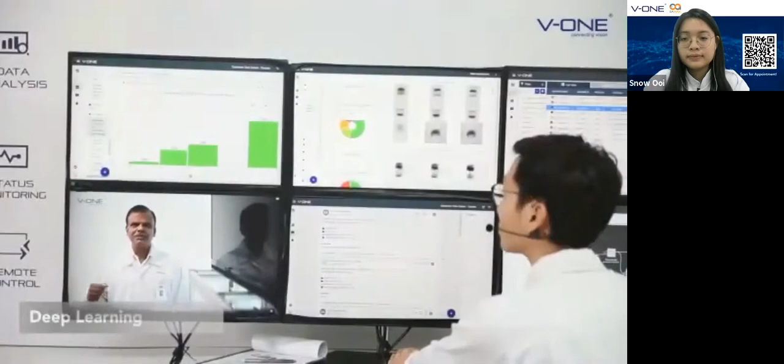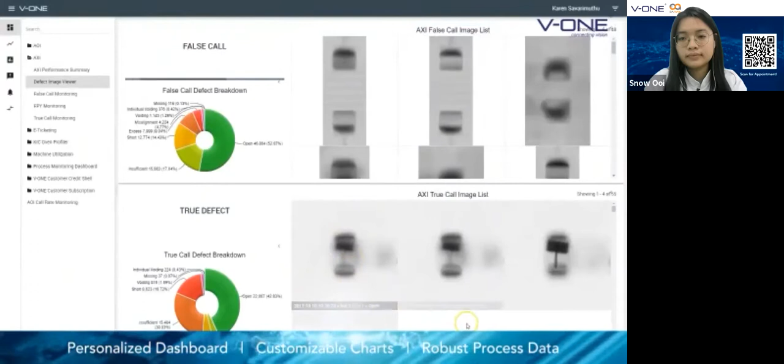V-ONE is a smart manufacturing software-based solution that stores your inspection and production data on a real-time basis.

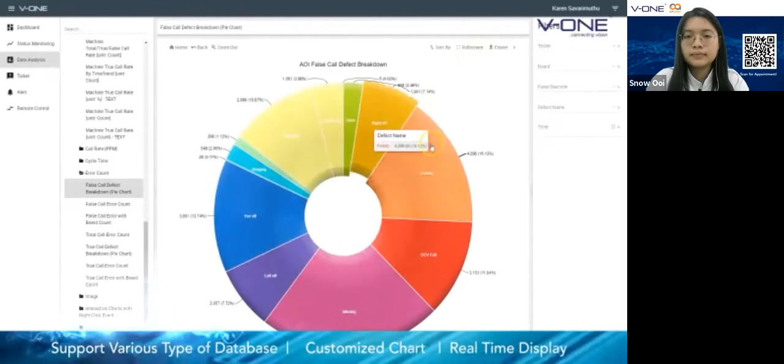Apart from the unlimited access to your personalized dashboard, the configurable triggering system will alert you on the abnormalities in a machine beforehand.

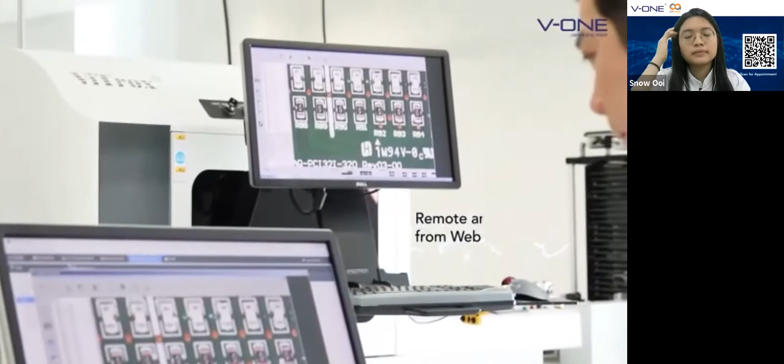With the latest V-ONE, we provide real-time notification and e-ticketing features to help users achieve no-touch time and smart manufacturing goals in no time.

With the idea of connect, visualize, and proact, V-ONE stands out in Industry 4.0 as it is applicable to customers of diverse industries.

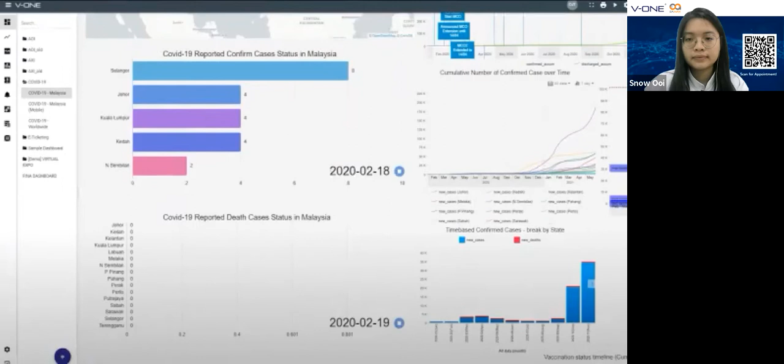Life is not always peaches and cream, as we are currently experiencing these unprecedented and difficult times. But in every book of life, you will have a chapter called hope. Hope that there is a ray of light at the end of every dark tunnel.

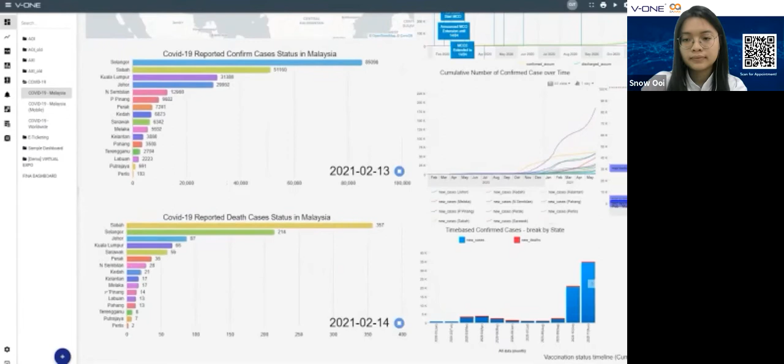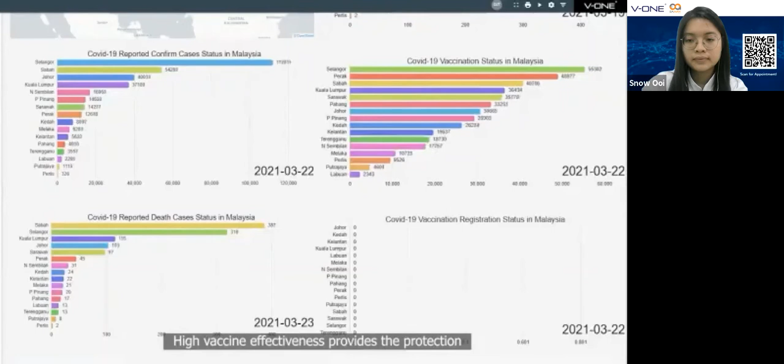Vaccination gives us hope amid variant concerns. In the meantime, COVID-19 vaccination status rate has recorded a consistent increase. High vaccine effectiveness provides protection against infection and reduces the virus's damaging effects.

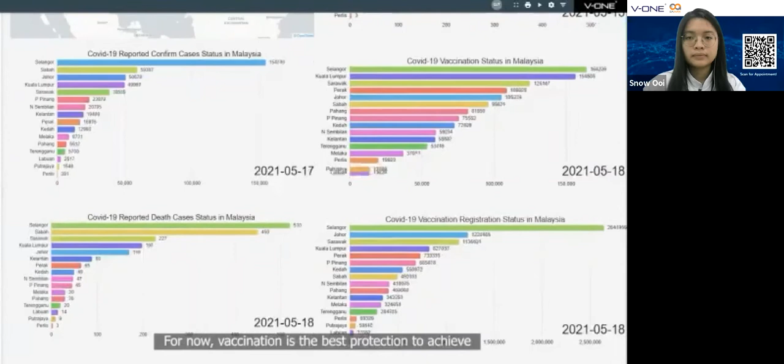We need to be open-minded and confident with the vaccine brought into Malaysia. We need to get vaccinated to protect ourselves, our family, and our loved ones. For now, vaccination is the best protection to achieve group immunity and bring us back to our normal life.

Same goes to the production line. You have to strengthen your production's immune system to increase the level of efficiency in manufacturing operations. In return for the Caring Act, V-ONE will be one of your boosters to the machine-to-machine's immune system, reducing machine downtime while increasing throughput.

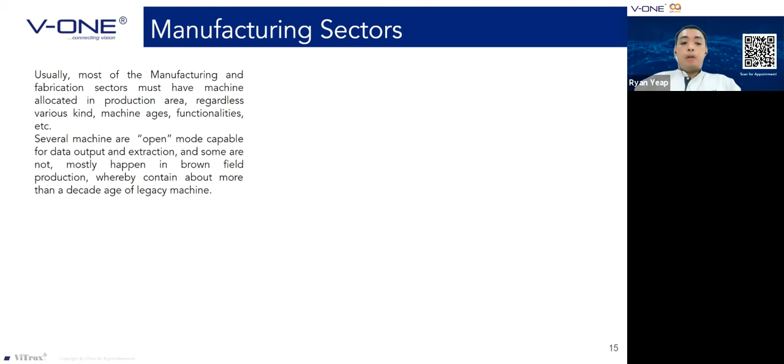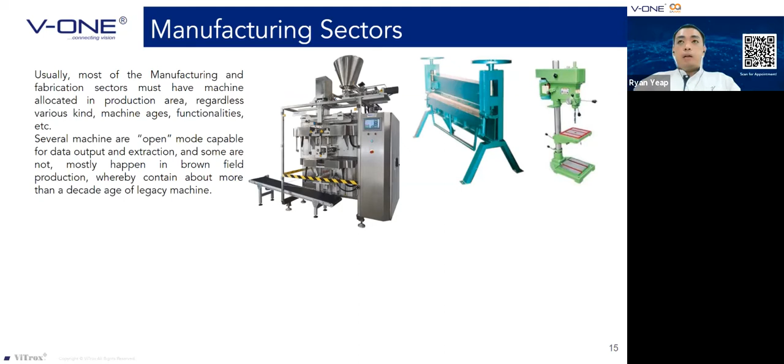Like most of the assembly industries, usually most manufacturing and fabrication sectors must have all the machines allocated in the production areas, regardless of various kinds of machine age and functionality. So most entrepreneurs might wonder and doubt whether the production capability can be sustained for another decade.

So the current condition of the machine, production operation versus ROI, and all of these questions require data to be analyzed. And the answer lies under the operation and production machine. So in order to acquire this data, we need to observe the machine specification itself, regardless of old or new, to see whether it still possesses IoT data extraction capabilities.

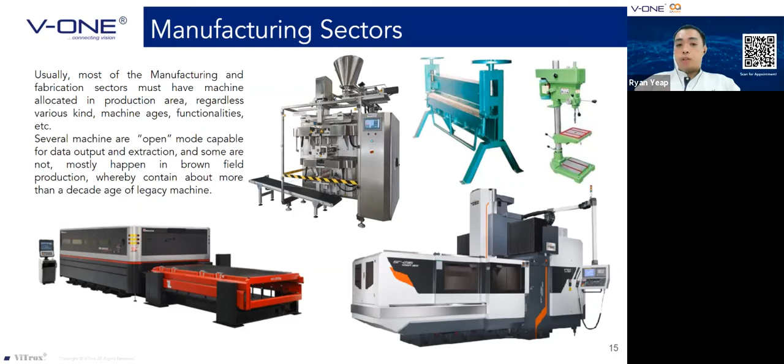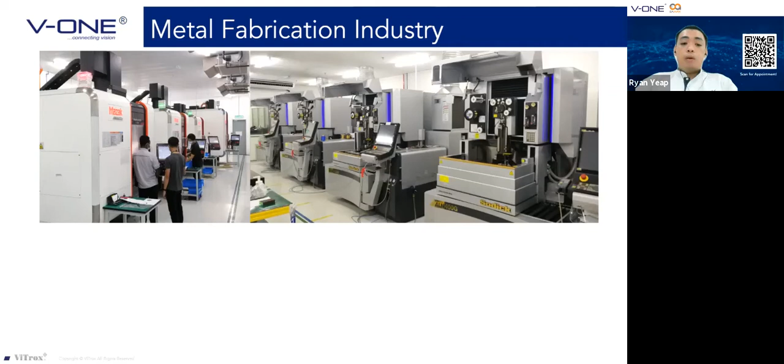So I would like to move on to the very first use case that I'm currently working on, which is the metal fabrication industry. This industry owns numerous kinds of fabrication machines and processes, such as CNC lathe machine, wire cut, milling, turning, laser cut, powder punch, bending, and welding, and so on. Each machine and process also contains crucial parameters according to their functionality.

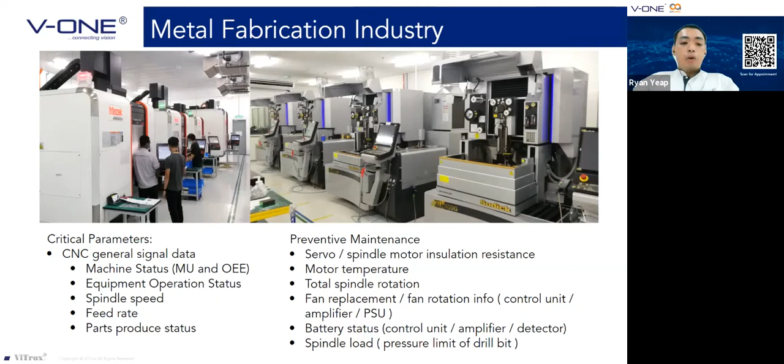So we are going to move on to one example of a standard CNC machine. As you can see in the picture shown here, this is one of the standard CNC 3-axis lathe machines.

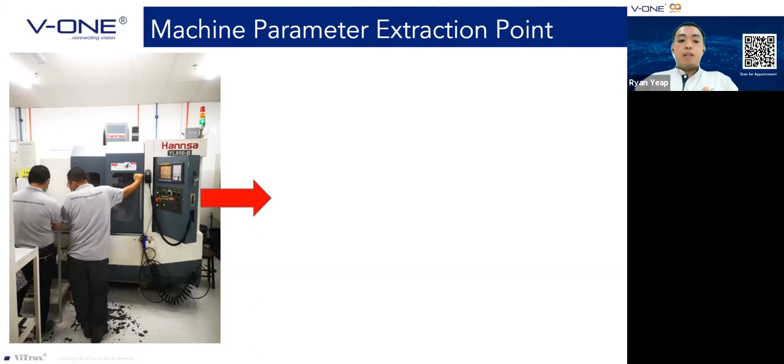Okay, so the CNC 3-axis machine has cutting tools that move along the 3 axes to mill the parts or cut various kinds of materials. It will perform a lot of fabrication such as milling slots, drilling holes, and also doing some cutting of edges.

Okay, so for this machine itself, we need to understand the concept of the machine operation and also the specification. By judging on that, you may find it contains numerous parameter data that can be acquired by using an appropriate IoT solution.

Okay, so for example, if you would like to see the condition of the machine operation, you can tap it from the tower light signal. From here you can get the machine operation. And for the motor, you can get the motor vibration data from the motor. And for the NC program, you can get the program job and the counting, and also the alarm log.

And then if you want to capture some equipment consumables, you can capture the oil level and pressure. So utilities like air pressure, drill bit, and the sprinkler, we also can acquire that.

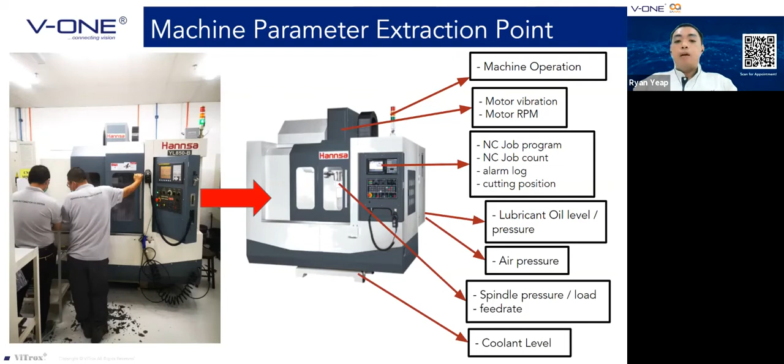Okay, so let's talk about one of the very critical, reliable core pieces of equipment for operating the machine, which we call the motor. Just like our human heart, the motor is a crucial part of the machine responsible for machine operation. Without it, or with any malfunction occurrence, it may be considered a total machine disposal, or there might be a chance for recovery such as repair or replacement by certain motor equipment, which is still available in the market.

So therefore, in order to ensure the motor equipment functionality, several precautions need to be done in order to prevent any downtime. One reliable method is to acquire equipment data from the motor itself. We assist with the appropriate parameter to determine the equipment health, for example, the vibration. So for the parameter, we determine the motor operation through the vibration frequency trend.

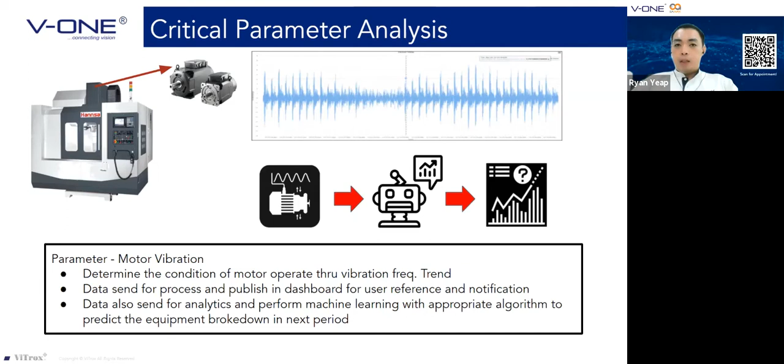And then the data we're going to send for processing and publish in the dashboard, or we can use it for doing the prediction of when the machine is going to break down. So we send this kind of data for the machine learning to train up, and then it can predict in the future, in the next 3 months, what the motor condition will be.

For the motor itself, we need to use an appropriate sensor as well. So by using a common and appropriate sensor, we call it a vibration sensor, which can be found in the current IoT market.

Besides this, we also need to understand the motor that has been used in your production machine - what kind of motor type and specifications, such as horsepower, pole, max RPM, and some other specifications. We need to understand this in order to estimate the vibration that can be produced by the motor itself.

But the thing is, for all those kinds of specifications, I think for the end user who might not have this kind of experience, by default you can search for another standard type of vibration sensor that can support up to 1 kilohertz, as this sensor can read the capable range for all kinds of machines and all kinds of motors.

As the motor is relied on to operate, the motor will be responsible for rotating the spindle. So another parameter we can measure is the spindle, which often has a shaft at its heart, and usually we attach a drill bit and the tooling to the spindle by grabbing it, in order to perform any fabrication job.

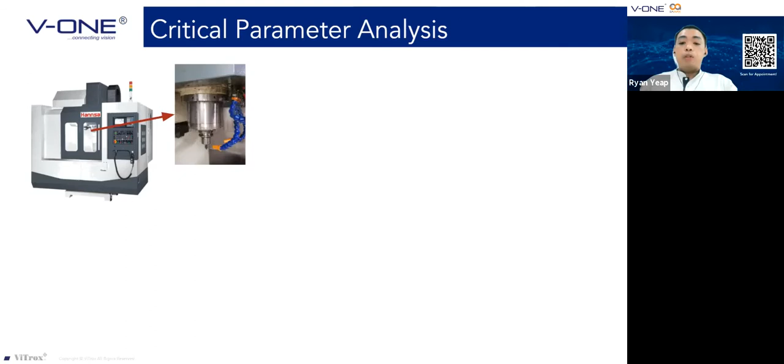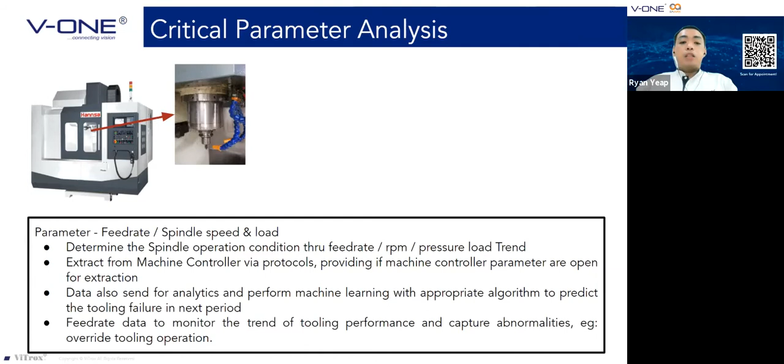As the fabrication process involves various types of material that need fabrication, some require precise specification or also concern the cost of time. So therefore, speed is the major parameter we need to take into account. So for the spindle, the parameter we can acquire is to determine the spindle operation condition through feed rate, RPM, or pressure, by generating the trend, extracting all the data, and then sending it to the database to also perform analysis.

So the feed rate - we're going to collect all the data so therefore we can monitor the trend of the tooling performance, and also capture the anomaly whereby the feed rate is being set too high or too low, according to the manual setting.

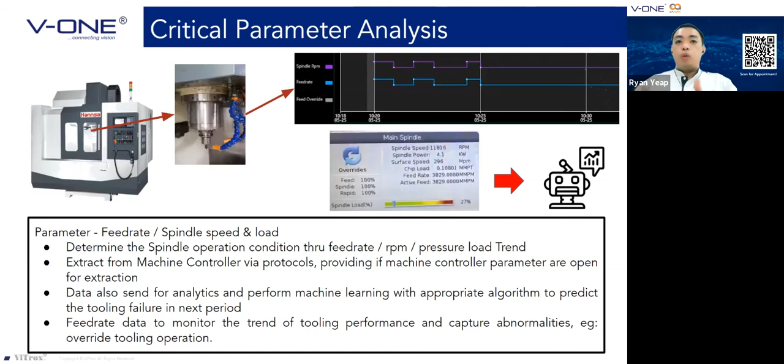The next topic is machine utilization. We might be wondering about the current status of our production machines. In case a user needs to go down to the production field to monitor and check the current operation status, this might be inconvenient because they have no place to see the entire production or the machine condition.

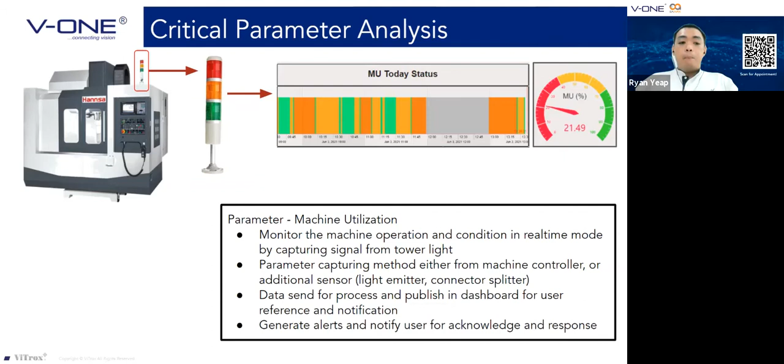Therefore, by using simple IoT equipment to deploy, such as capturing the signal from the tower light itself, the signal tower will convert all the signal into digital form, acquiring the signal and converting it into digital form to generate and publish the data into one place. This will also help calculate the machine utilization for a certain period. For example, we have one use case, which is this POC kit, currently developed at one of the legacy machines, whereby the legacy machine cannot extract the data from the machine controller itself.

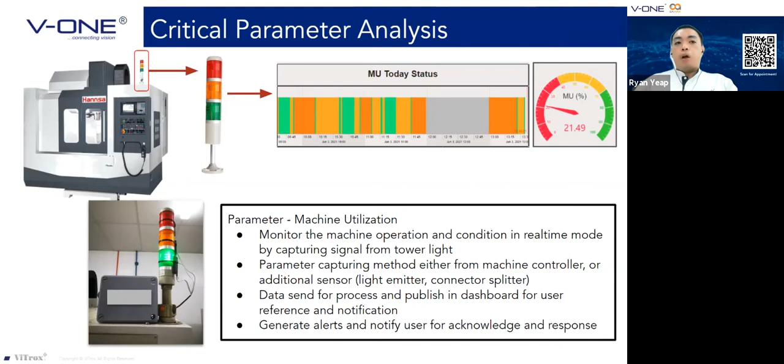So we are applying an additional sensor on top of that, in order to capture all the machine utilization status, for all machines, regardless of old or new, as long as the machine controller itself can extract the data. By extracting the data from the machine controller, you can acquire other important information such as the NC program job execution, alarm classification, and job quantity counting.

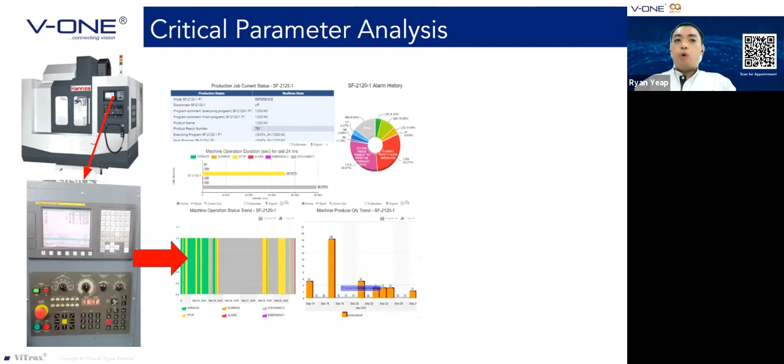Most machine controllers in the market, such as Fanuc, Mitsubishi, and other machine makers, provide their controllers using open protocols like MQTT, MT Connect, and OPC UA. So this data can be extracted using a LAN cable, and you'll be able to extract this kind of valuable information.

So the data is sent and published into a dashboard for user reference and notification. In some cases, the DAQ, which is called data acquisition, in analog form, was not able to extract from the machine controller, or some parameters in the machine controller don't contain it, such as by detecting the USL or LSL.

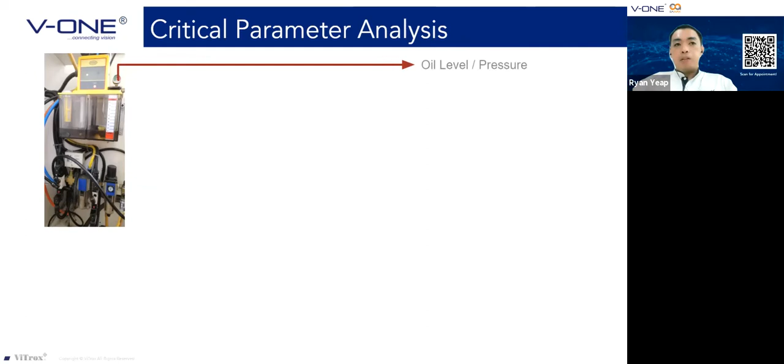So what we are going to do is add an additional sensor on that particular equipment, such as for lubricant oil or air pressure, in order to get all the data and read the trend. The purpose of using this is because we need to prevent occurrences by giving an early warning signal. So DAQ is a must to play an important role in giving users early preparation.

This can be achieved by installing the appropriate sensor to collect all the analog data and put it into a graph, then determine the USL and LSL thresholds, sending a complete signal to the triggering system for the user to have an early warning alert. So the user may be able to perform necessary maintenance before the machine gives an alarm signal. This is the purpose of using DAQ on those particular parameters.

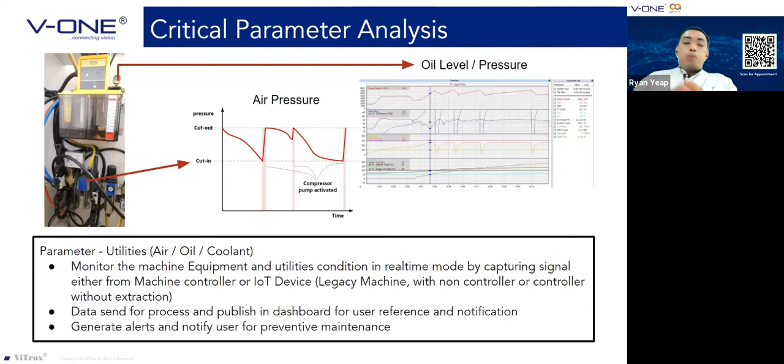Once we already know our machine operation and its characteristics, how are we going to implement this? I believe you already have some idea of the critical parameters you wish to gather for further analysis. So maybe here comes a major common question: how do I get that?

For the very first stage, we call it the connect stage. You can find numerous solutions in the market that offer various kinds of IoT products and service solutions, such as selling specific IoT sensors, providing IoT consultancy services, developing IoT protocols and gateways, and others.

In general, the makers, distributors, and service providers, no matter what kind of IoT connectivity solution is provided to the clients, a very crucial point is that the solution must be capable of allowing the user to extract the data in order to perform data analysis, and also for other uses such as statistics, visualization, reporting, machine learning for performing prediction, and so on.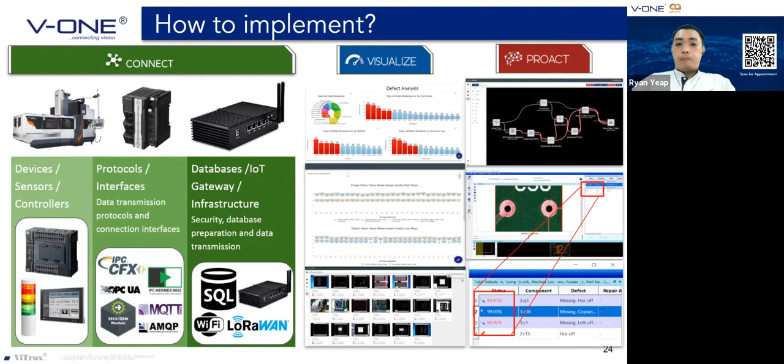In the current market, most well-known machine protocols as well as database technology are open for all users to freely perform data extraction, big data analytics, and analysis. Well-known machine protocols like MTConnect, OPC UA, IoT edge protocols like Modbus, MQTT, and machine-to-machine protocols like SECS/GEM are available for users to make a bridge connection for data extraction.

Therefore, business intelligence platforms also play an important role by giving users the freedom to collect useful information and visualize statistics, and also perform further analysis such as prediction. The V-ONE is the one that has all those features I just mentioned.

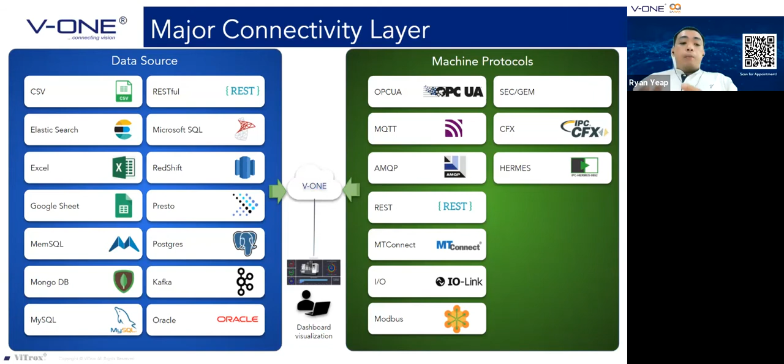So the fundamental connectivity for production machines towards data extraction is set up as shown in this diagram. For all machines, regardless of new or brownfield machine, with a connection established and the port connected, assisted by IoT device connect or IoT gateway for legacy machines, data extraction happens via protocols or gateways. For new machines, we convert all controller signals into data form and store it into a classified database. Then the business intelligence platform will log into the database, grab the data, and perform analytics.

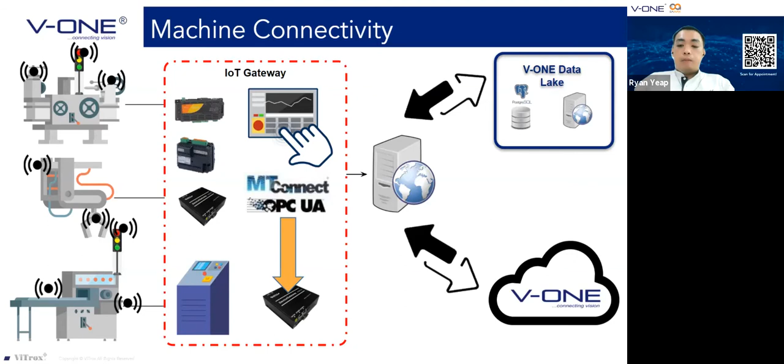So the whole strategy of the IoT enable process starts from IoT edge technology towards the business intelligence platform. It's not a simple task and requires a lot of effort to execute in the connectivity stage, because of numerous edge solutions and application solutions worldwide dealing with various kinds of industry. We need to identify a specific and suitable solution to deal with the specific parameters and processes currently practiced in a certain industry.

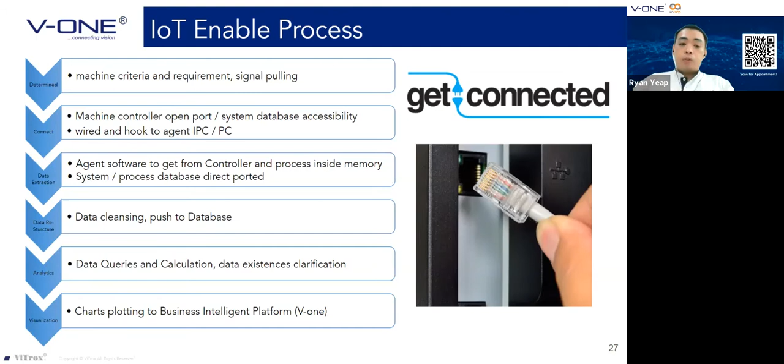Furthermore, it's not necessary to implement 100% or acquire 100% of the info from the machine or processes, as some parameters might not be required for analytic purposes. So I advise targeting the critical pain points, focusing on implementing those, and expanding for improvement in a future stage. This is what we call 'start small, scale fast.'

I believe some of the audience might hesitate on deploying this in their work field, in their production. So what advantages can bring ROI to their business? I'd like to highlight some benefits that might clear your doubts.

The good thing about deploying data analytics is it can give you an early warning that something is going wrong in your machine or production line. This can prevent your asset or the process from occurring further damage. By following this early detection, it can also prevent or bring down any loss chance at your machine or production process line in terms of cost, time, manpower, and so on.

With data analytics deployed, the personnel in the company are able to make good decisions on planning and preparing, in terms of job arrangement, time management, material management, and so on, which potentially affects the entire corporation and operation.

When you have your data on hand, users can get real-time info and generate various kinds of reporting or visualization for the team for traceability purposes, or for the machine for inference and prediction. I hope this brings valuable info to all the audience, and please take this key takeaway that I strongly emphasize: get your strategy now or never.

Are you worried about business disappearing due to digital automation transformation failure? Do you feel in the dark about production floor activities? Do you believe digital automation transformation is expensive? If any of these are true, we can help. At EAMAX, we've already helped more than 300 SMEs automate and digitize their production floors. Here's how we make that happen. We provide simple, reliable, and cost-effective industrial digital automation solutions. We help manufacturers make fast, accurate decisions by transforming data into actionable insights. And we guide manufacturers toward embracing new production techniques and business models at scale. At EAMAX, we're a company of experienced, driven, professional digital automation engineers. We specialize in all things automation. Here are a few highlights.

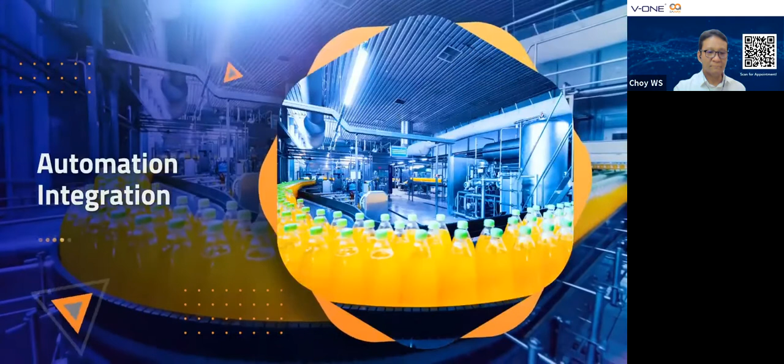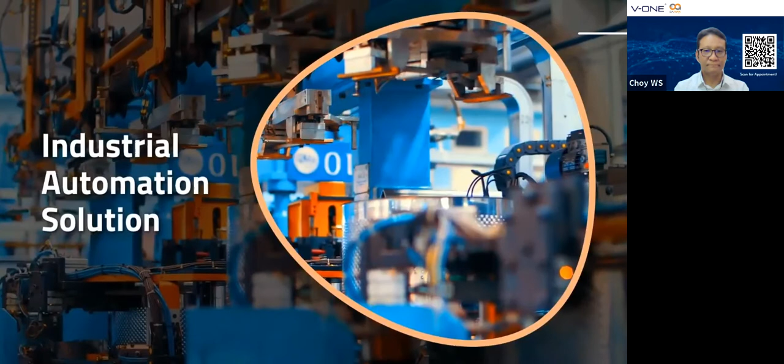Today, rising labor costs, shrinking talent pools, and growing competition are adding pressure for SMEs. Our industrial automation solution gives you the tools to shift this dynamic. We always promise and deliver the most simple, cost-effective solutions.

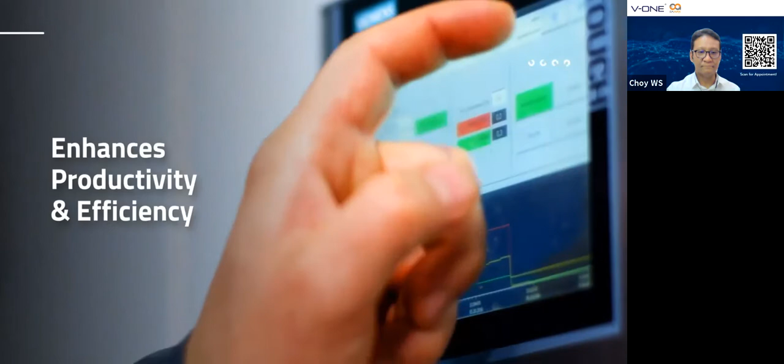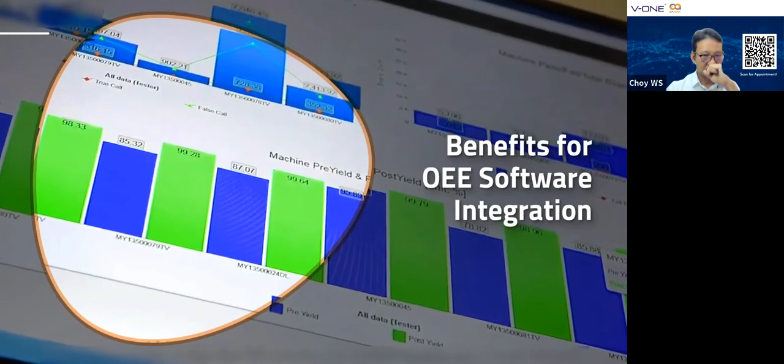Automated and real-time production monitoring enhances productivity and efficiency. It helps reduce costs while identifying opportunities for improvement. The benefits of OEE software integration affect entire companies, regardless of the size, industry, or production process.

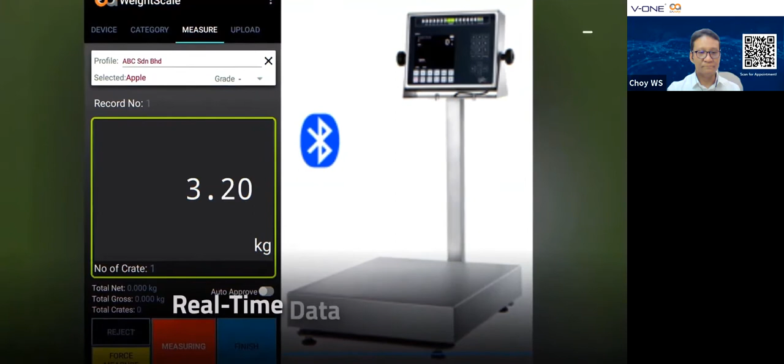We've redefined the traditional method of manual weight data entry. Our all-new IoT weight scale solution enables real-time data capturing, with the option to push data directly to any enterprise system.

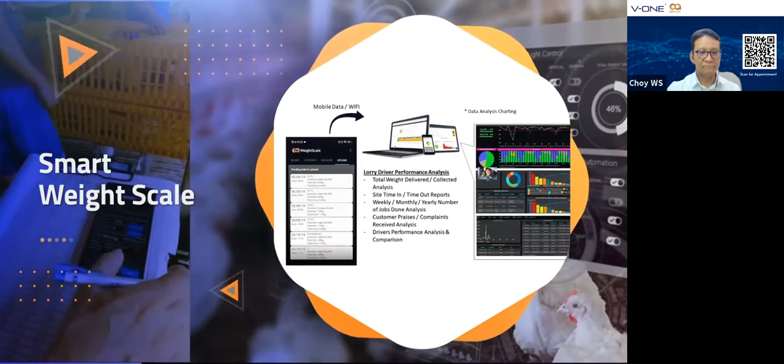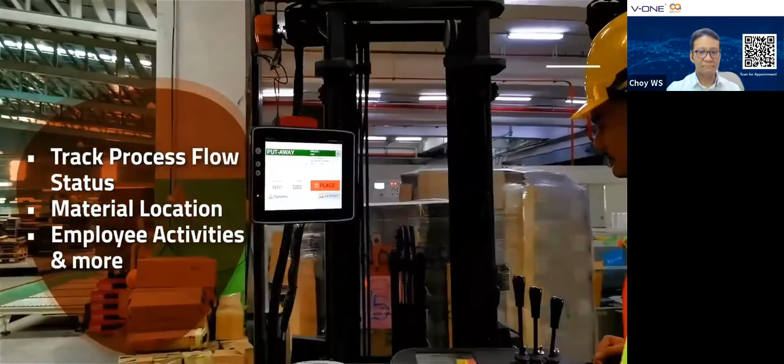The implementation of RFID technology involves a combination of the latest technology, such as RFID tags, BLE beacons, and gateways. This helps manufacturing companies track process flow status, material location, employee activities, and more.

Common problems faced by factory managers include finding the right staff and paying them accordingly. Outsourcing can be a great way to manage your resources and workload. Our experienced engineers help make that happen.

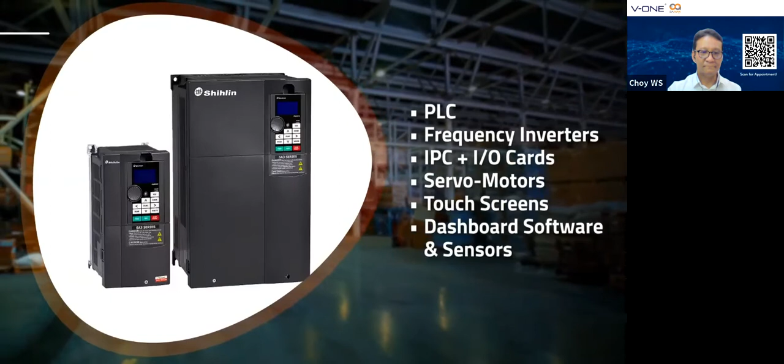We supply and maintain inventory for a broad range of world-leading control and automation products. Our stock includes PLC, frequency inverters, IPC plus I/O cards, servo motors, touchscreens, dashboard software, and sensors.

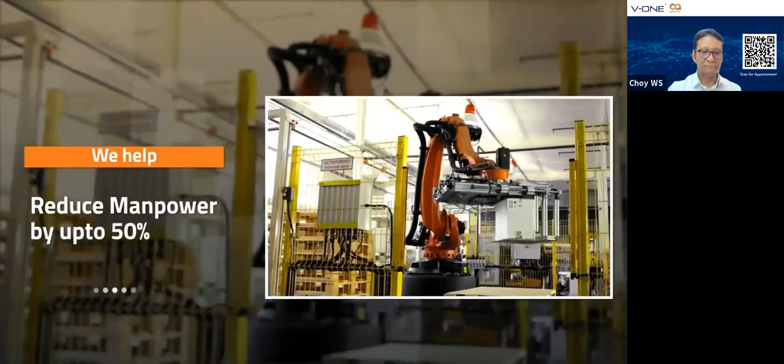At EAMAX, we don't just talk about our commitment to client success. We have proof. We help reduce manpower by up to 50%, improve efficiency by 25%, reduce downtime by 20%, and we take QC rejections down 30%.

While we're headquartered in Malaysia, our client roster covers the globe from Asia to Europe to North America, and we're constantly growing. We're EAMAX, and we're more than a manufacturing partner. We're a full-service solution that will save your company time and money while preparing you for the future of manufacturing.

Let's work together to digitize, automate, and achieve your goals. Let's work together to maximize your success.

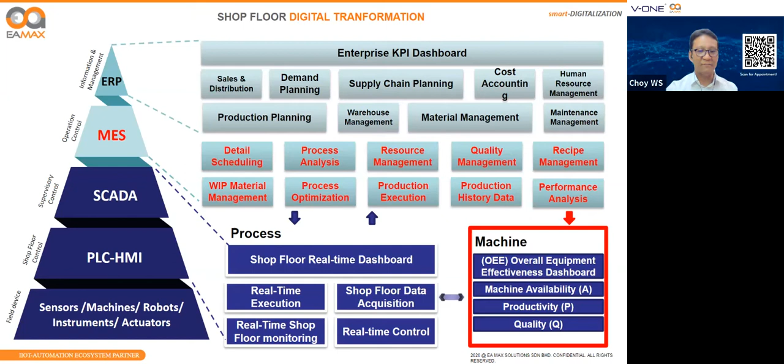So I'm going to talk more in the next slide. Here, I give you a very simple diagram for understanding how OEE is defined.

Can you imagine OEE is a big engine? There is a plug under the MES. In order to run this engine, you need data. You need to input some data, and all the data is from the PLC and HMI as shown in the diagram.

You have run, stop, trip, total count, good count, bad count, all that. You need to fit it in. And meanwhile, you need to key in your cycle time and production plan time, and all that.

Then this OEE machine processes the data. It tells you the value of APQ. A is availability, P is performance, Q is quality. Then with a very simple formula, multiplying them together, you're able to get the OEE.

Then the ERP will provide information about the schedule, about the work order, to the MES. Imagine one day your sales department just gets a big order, with 5,000 pieces of parts needing to be delivered within 1 week. Based on this situation, what do you think the operator is going to expect? Any idea? Just have a guess.

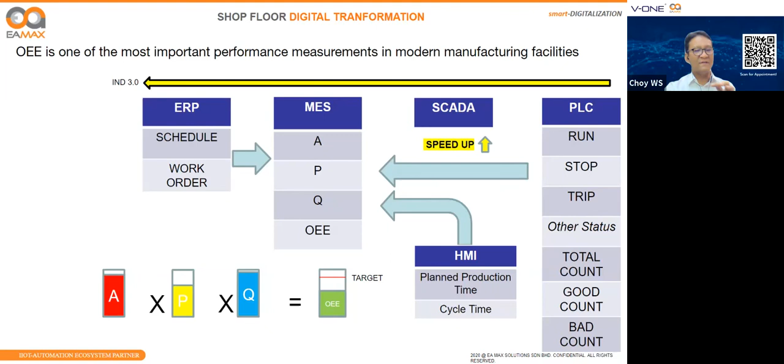I also call it an imperfection of Industrial 3.0. Actually, whatever I just mentioned to you, the whole process is Industrial 3.0. That's why Industrial 4.0 with machine learning is a good fit.

The machine learning will inform the operator what value to set - the optimum value. After a certain period, imagine when you already have big data in the machine learning, what are you going to do?

The machine learning will directly command the PLC now, without the operator. It will directly optimize the whole production flow. Now we can see the advantage of Industry 4.0 - everything becomes automated and optimized.

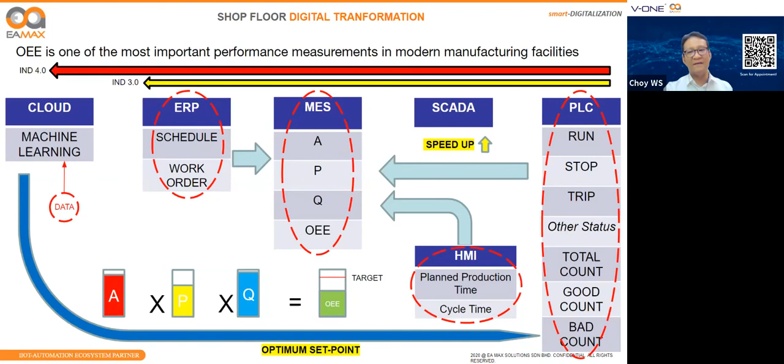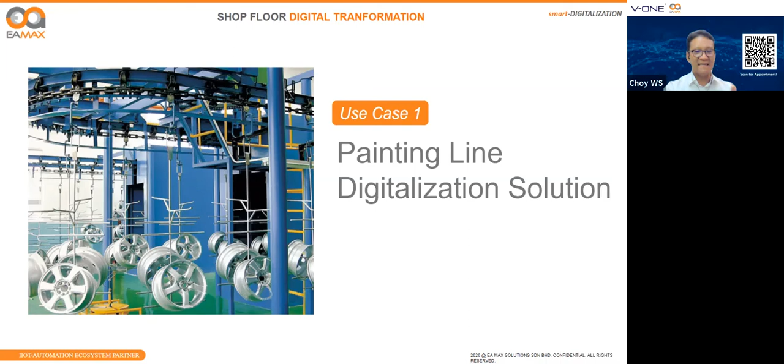After covering all the concepts, let's jump directly to the use case. Let's see how we transform the legacy painting line into a smarter machine. Just to give you a basic understanding.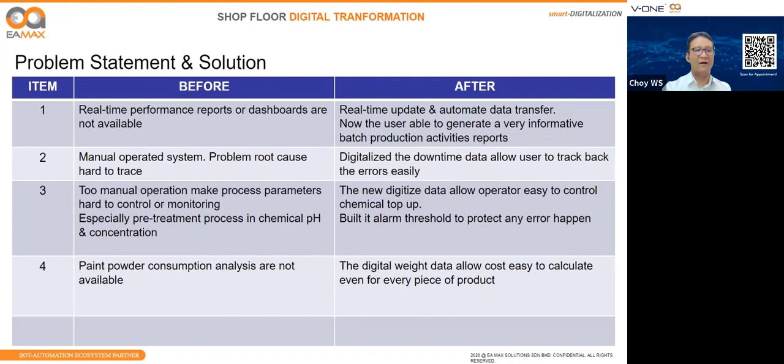Next, I'll jump straight to use case 2. This is the sheet metal digitalization solution - this time our target is the CNC machine.

Okay, so just to give you some idea, this customer is one of the very reputable OEM car metal parts makers. They produce a lot of parts for Proton, Toyota, Honda, and are in the metal part processing industry. The implementation section will be the CNC machine center.

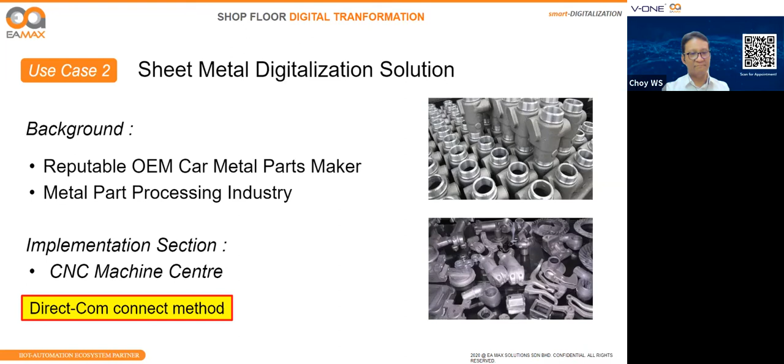For this case, we're going to use the direct com connect method. What's a direct com connect method? It's easy, like 1, 2, 3.

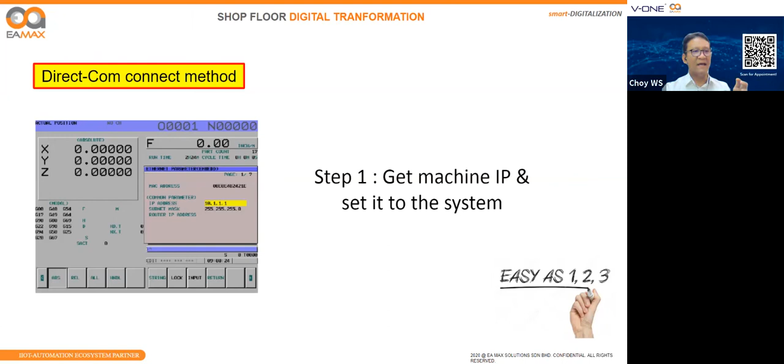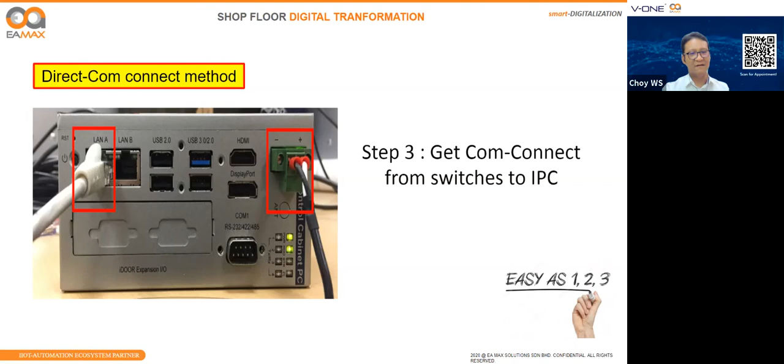First, you need to get the machine IP and set it to the system. Secondly, you get com connect from the machine to the switches - you connect a cable, the Ethernet cable. Thirdly, you get com connect from the switches to the IPC. It's so simple, you can see the whole block diagram here, the architecture diagram.

You can see all the machines are well organized and connected to those switches and IPC. They gave us very good support, and we managed to have a very good architecture. Then after the master IPC station gets all the data, they pump all the data up to the cloud. Then from V-ONE, you can see a lot of the beautiful charting, reports, and all that.

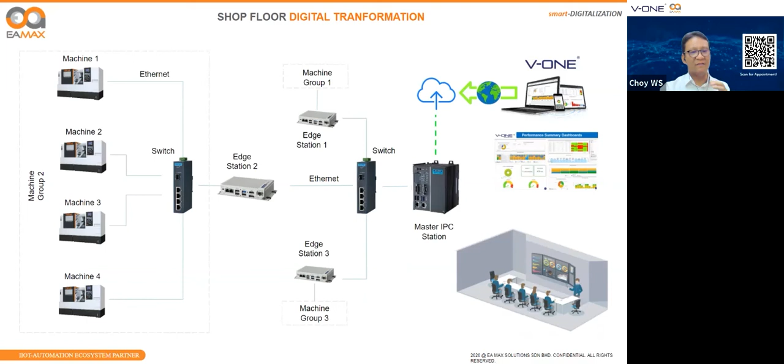So similarly, let me tell you the problem statement and solution, what they were facing before. They were facing MU unclear - they didn't know what's the machine floor MU. Now we already let the plant manager take control of everything. They better know what's the capacity, the currently running capacity. Then either they want to take an order or not, they can decide.

Secondly, too many machine speed loss cases happened, with no proper tracking system. Why? In the factory, it's very common that machine speed has been purposely reduced because a lot of workers feel relaxed and want to reduce the speed - they want to work not so stressfully. But all of this has ended. Now we've digitized all the machine speed and downtime data, allowing management to easily identify the problem and cause. They cannot cheat anymore.

Third is about the pen and paper OEE recording system. Before, they had a problem with overnight reports - today's report only reaches the plant manager tomorrow. It's too late. Sometimes a lot of decisions need to be made fast, but it's too late, and the data is always not matched with the real production output.

After that, we digitalized everything. We allow the line leader to identify the current OEE value, whether it's leading or lagging compared with the target from time to time, then allow them to make the necessary adjustments to improve their production.

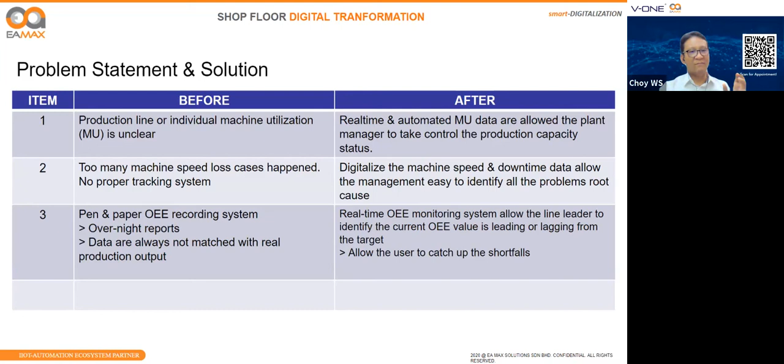With no machine network, what does it cost? No transparency, failure cannot be analyzed effectively. They're even unable to know the remaining capacity, unable to quickly check back the historical data, and everything is manual. But luckily, we managed to work with one of the CNC specialists.

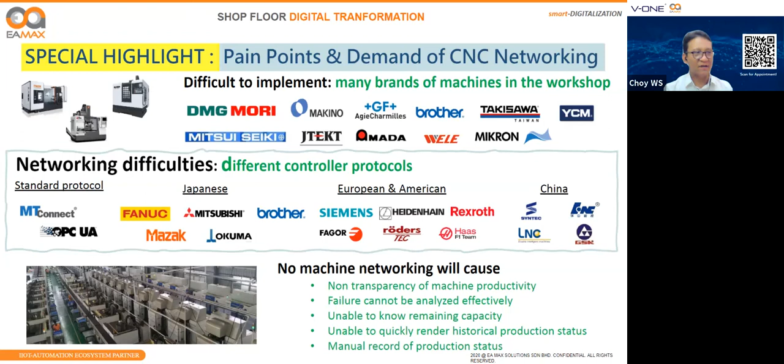They've been in this line for a long time, and they already have a protocol bank covering all the major and very famous brands of controllers like Fanuc, Brother, Mitsubishi - all of them. You can see from my slide, there's a lot of information there. So for all these series, we're able to communicate.

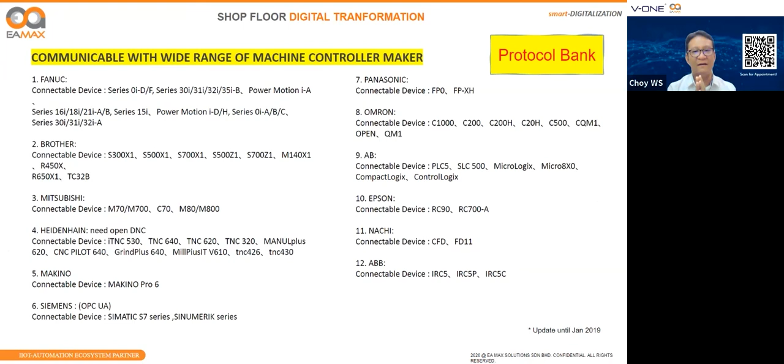I really hope everyone enjoyed this, and I hope my content is beneficial to everyone here. So lastly, I would like to say thank you, and stay safe and stay healthy always.